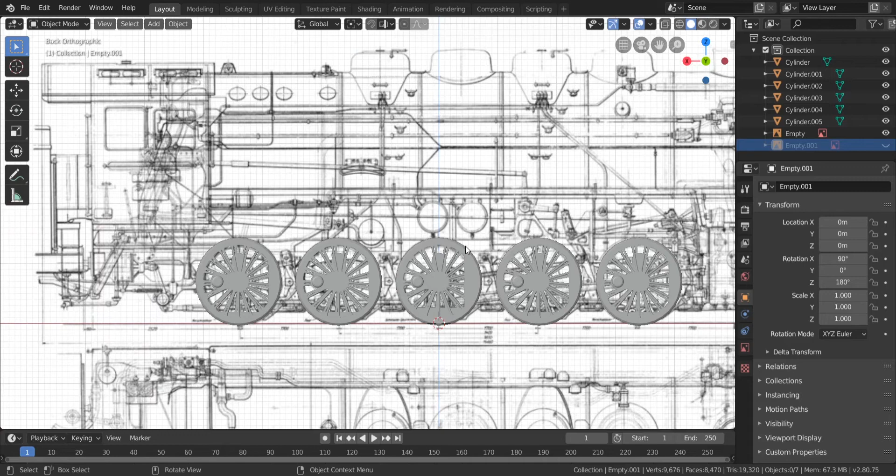Welcome back to the second episode on how to make your own steam locomotive for the mod. In this episode I'm going to be talking about frames. The way I make frames is pretty interesting, in that this is not how a lot of people make frames, but this is how I taught it myself, and this is how I'm going to teach it to you.

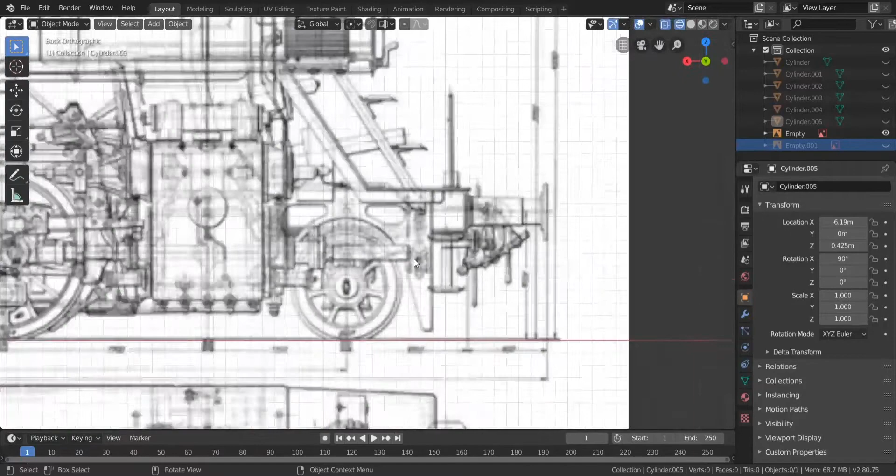So basically, what we're going to do first is, if you can find blueprints of the frame for your locomotive, like these, which I found online, it's going to be a lot simpler. These are actually very good ones, except for the resolution, but you can actually tell the frame on the blueprint. It's always nice to have blueprints like these. But if you can't find them, that's not really a big issue, since you can work without them. So we're going to just start by doing that.

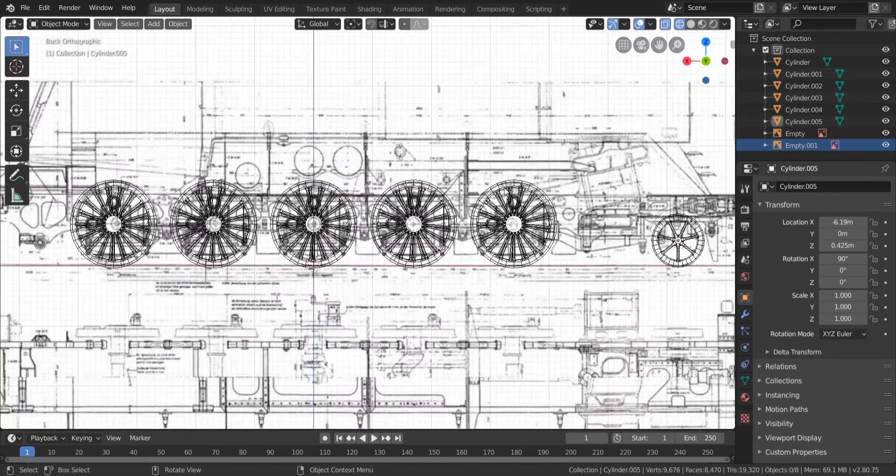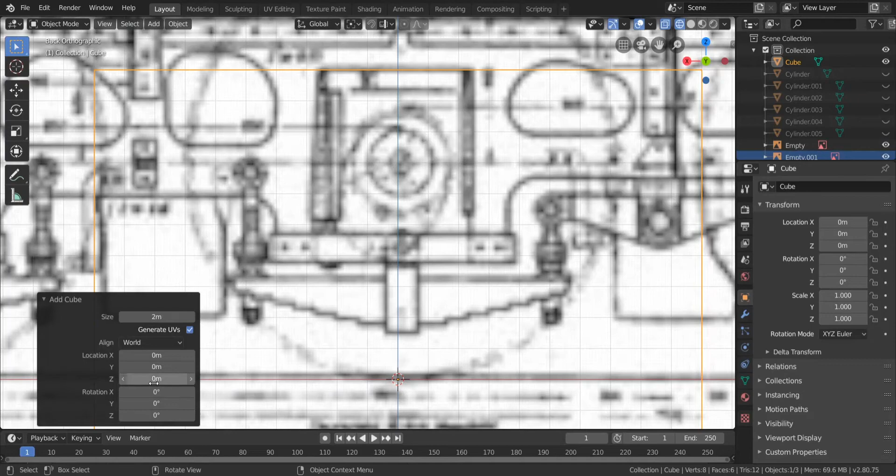One thing I like to do is always hide the wheels. When you have the blueprint scaled to the wheels, you can just hide the wheels and not worry about them for a while. So we're going to go into this side view and make a new cube. What I like to do is bring the cube up a bit and scale it down to 0.04, since frames aren't really that thick.

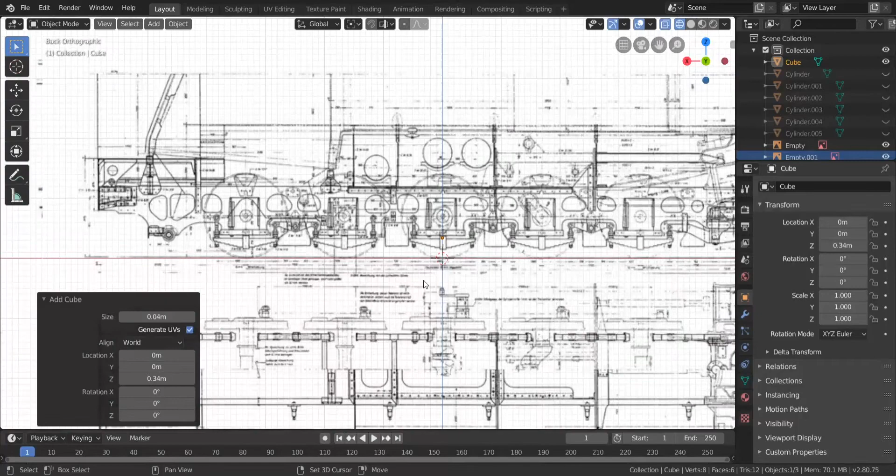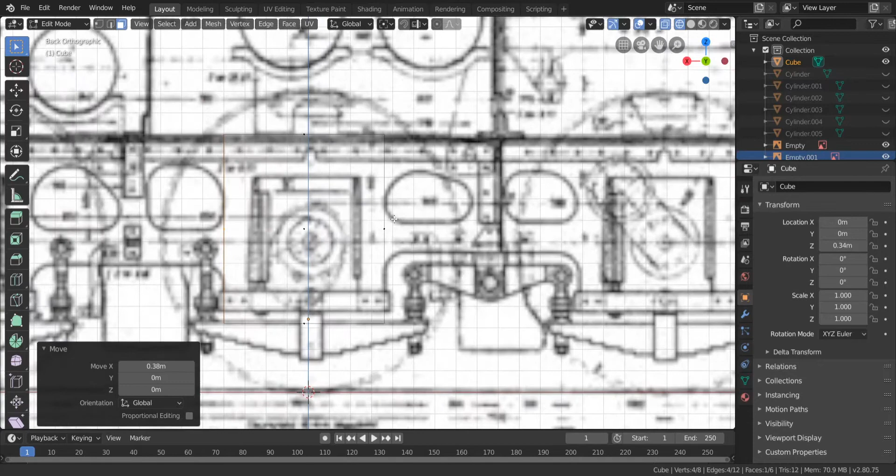So once you've got your blueprints, you go into edit mode and start scaling it to the right size. In my case, I'm just going to quickly do it like this. Seems good. And then on the sides as well. So how do you make this weird shape? Well, what I like to do is just extrude them like so, and then extrude again. We'll get into optimizing later down the line, but this is how you make the basic shape.

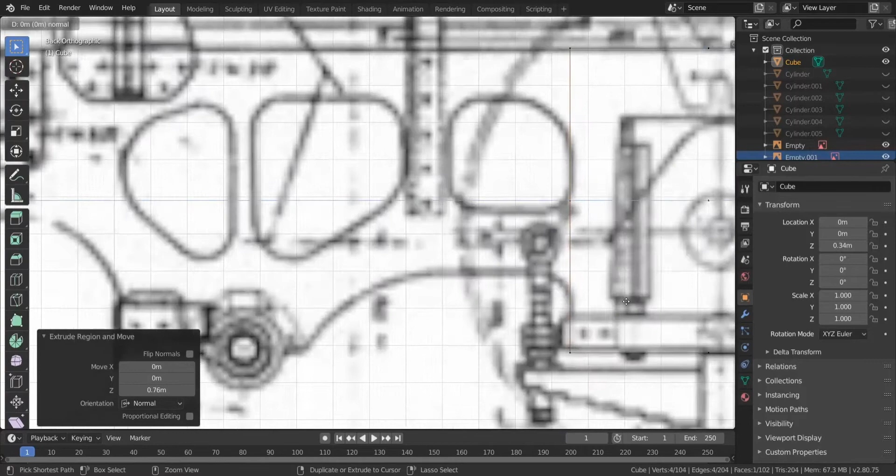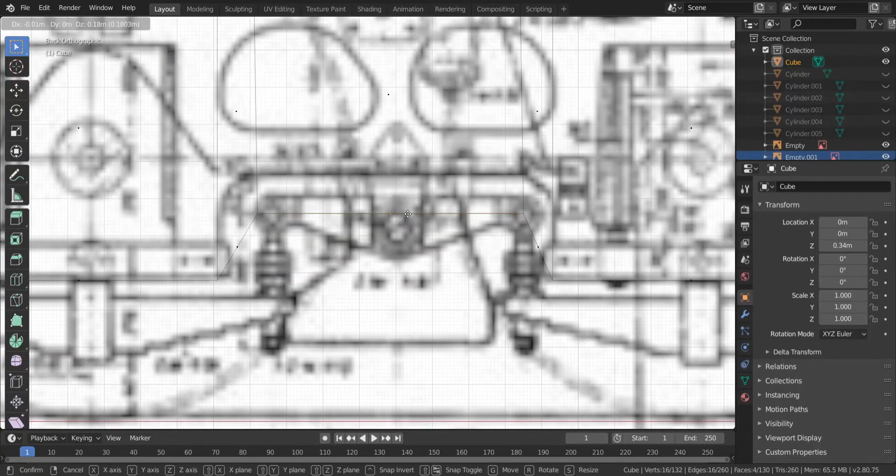Just repeat that a million different times till you have the whole frame covered, like so. Basically repeat that till you have the basic shape of the frame cut out like this. So I'm just going to do that. Alright, so what we're then going to do is drag the faces up to the right position. In my case, we're going to bring these up to this point, like so, without this. Then we're going to do a little bit of this.

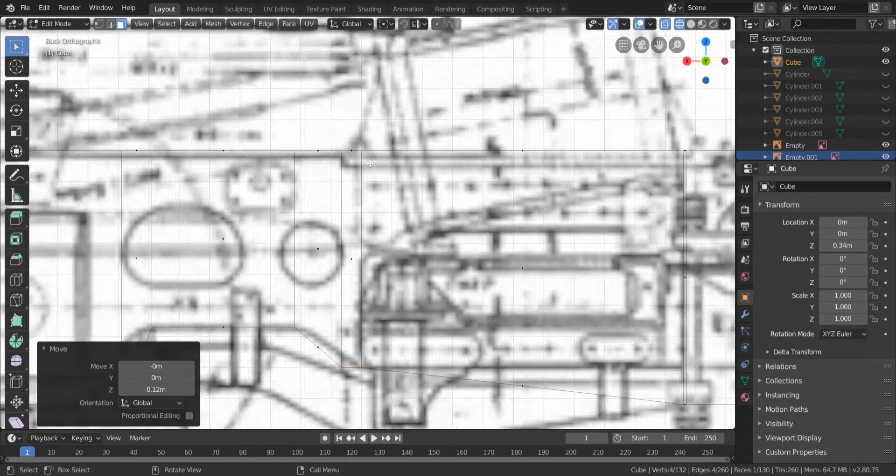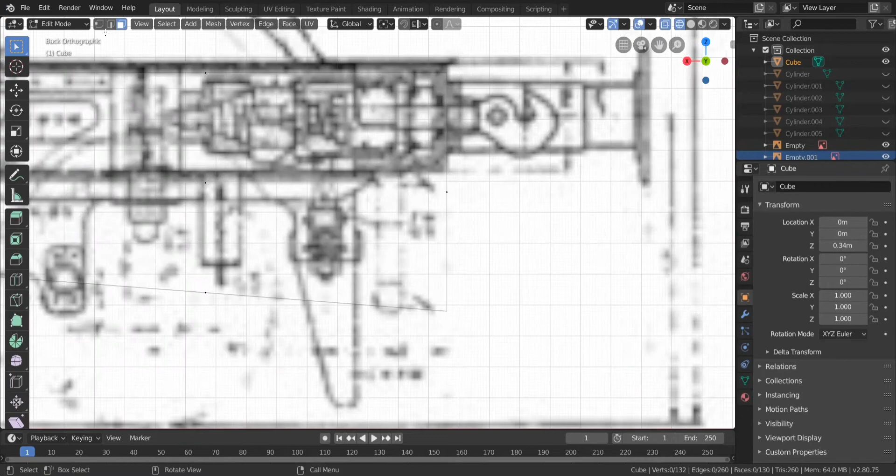The frame, as you can see, is actually one of the most time-consuming parts of the whole thing, since it's one of the most important things that gives the locomotive its shape. If the frame is wrong, you can really notice that in the end, which is something you want to prevent, of course. So you might want to spend some extra time on this, but don't worry about overdoing it. Like so. And then after that, I'm just going to speed that up.

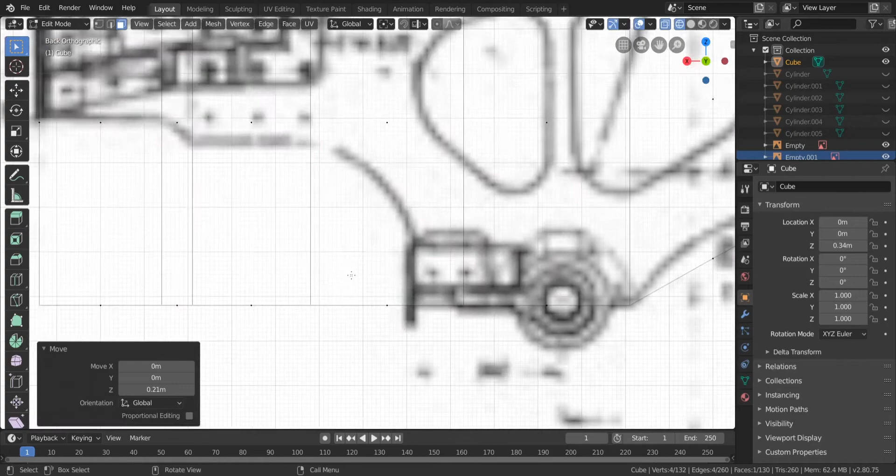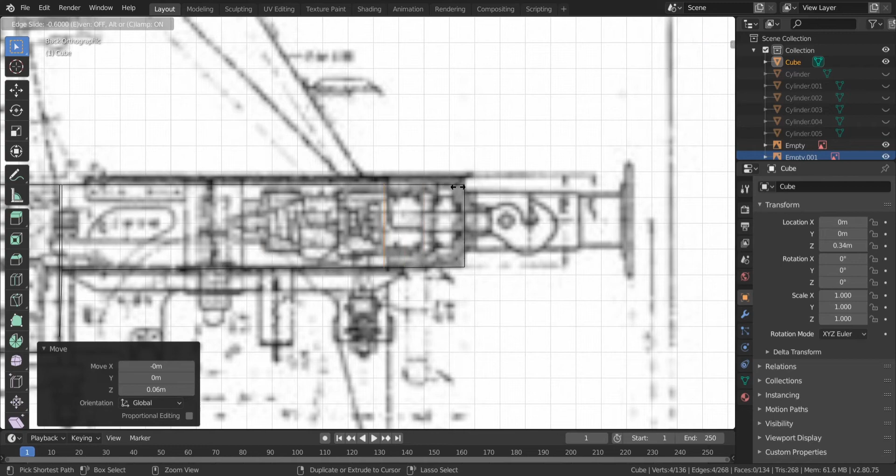Alright, there we go. So now that we have the basic shape of the frame, we can move on to adding the smaller touches. One of the things I normally do is make a loop cut right about here, so that I can make the buffer beam a little bit later down the line relatively easily. I'm going to keep it in the middle right now and then move it by itself so it doesn't get that weird positioning like you saw.

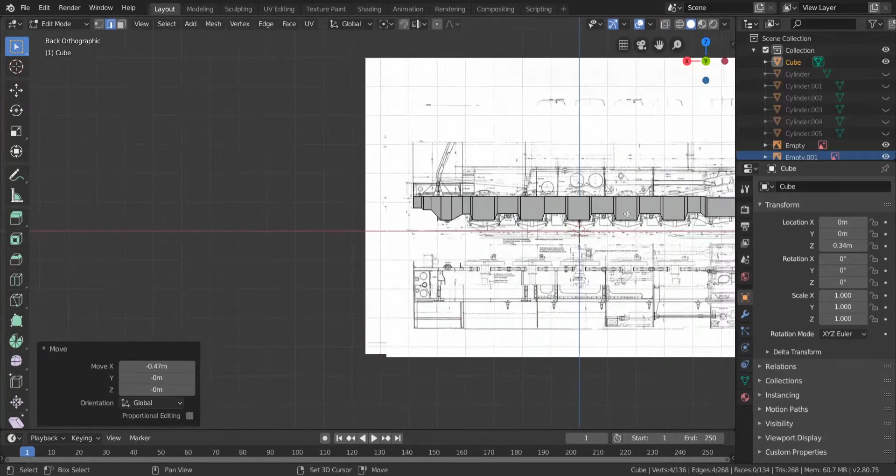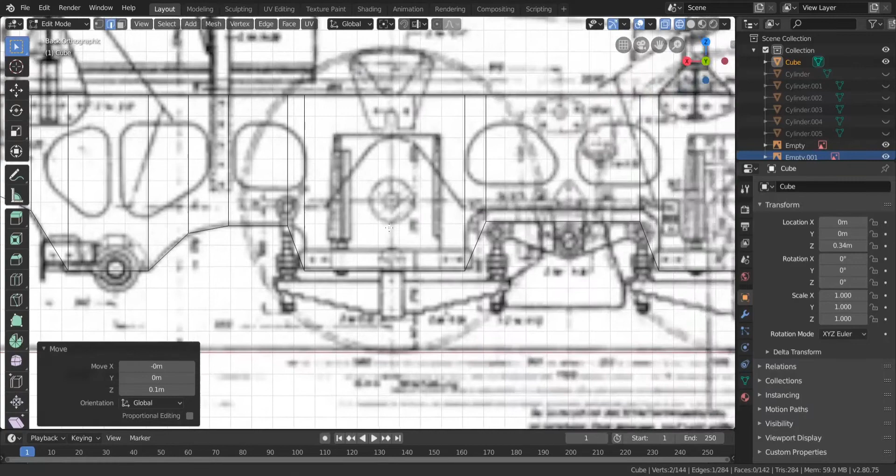And then we're going to make some more loop cuts in the middle here, and move that up just a tiny bit. We're going to repeat that multiple times till we're happy with it. And in some cases, if you really want your model to shine a little bit extra and don't worry about the performance impact, just make some bevels along the lines.

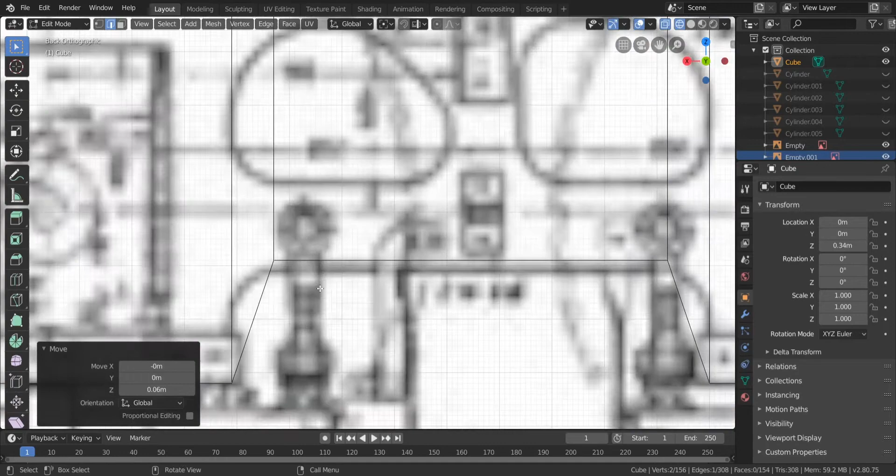But I'm not going to do that, for the sake of wanting this to be relatively lower in poly than most of my stuff, since I've been trying to keep my tris low, lower than, for example, the BR01s I recently made. Well, recently, that's already been a couple of months ago. But yeah, I'm just going to speed this up real quick.

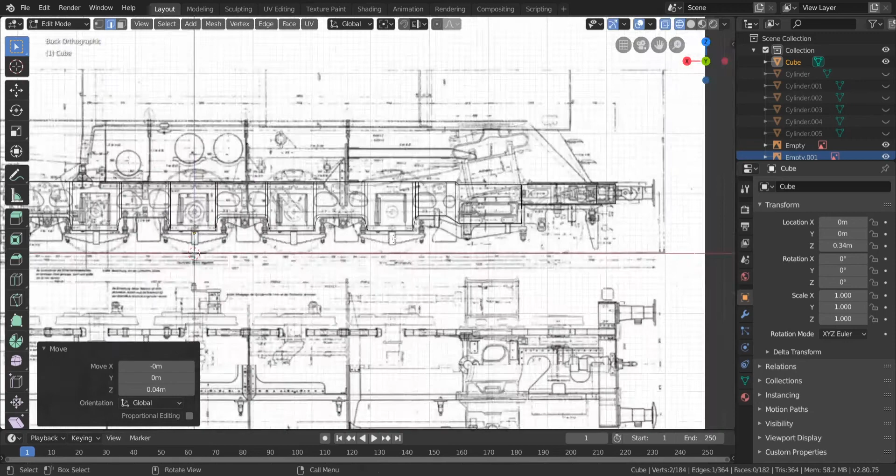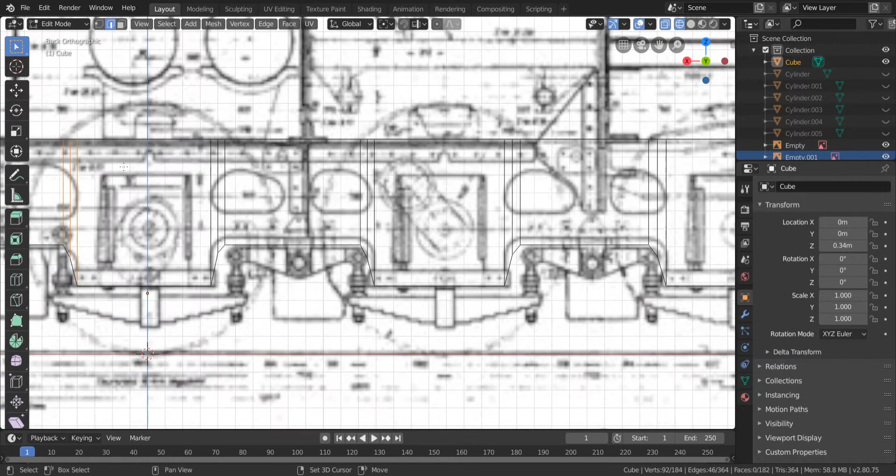Alright, there we go. So we now have this basic shaped frame. It's not that impressive, it's just a basic shape. But what we're going to do now is grab all of these side cuts, not the top ones or the ones that are like this, just these ones. Just select them all. And what we're then going to do is a pretty simple step, except this one, of course, which we just created, since we need that.

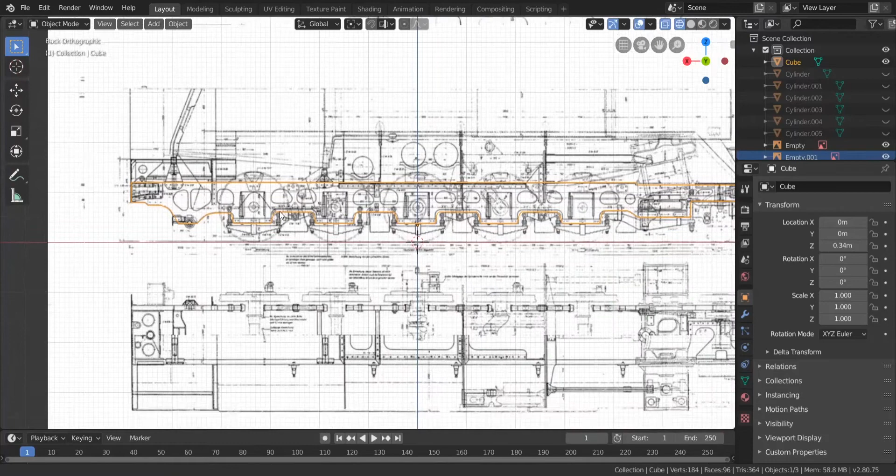And then we're going to dissolve edges. With that, they're gone, and the tri count is a lot lower than normal. So, what we're then going to do is unhide the wheels, the drivers, the trailing wheels, front wheels don't really matter. We're going to go into edit mode and drag it to the side.

But if you're not really comfortable with how thin it is, you can always just make it a little bit thicker in this step. So I'm just going to move it like 3 extra. I normally take 4 as like a starting point, but it also looks pretty good, so like so. And then what we're going to do is Shift D to duplicate it and mirror it to the other side. So what we're then going to do is join them again with Control J.

And the reason I don't have the screencast keys on is since I actually was kind of struggling with it, since I couldn't tell if I was doing stuff right myself. So that's why it's turned off right now.

So yeah, that's how you have like a really basic frame. And then we're just going to go into face select. Select these bridge faces. And then grab a front facing blueprint if you can, or if you know the exact width, go off of that. Since I have a front blueprint saved, I can just grab that front view. It also provides some other views like the cab, which is really handy, and some other stuff. But I'm just going to scale it up to the right size. So yeah.

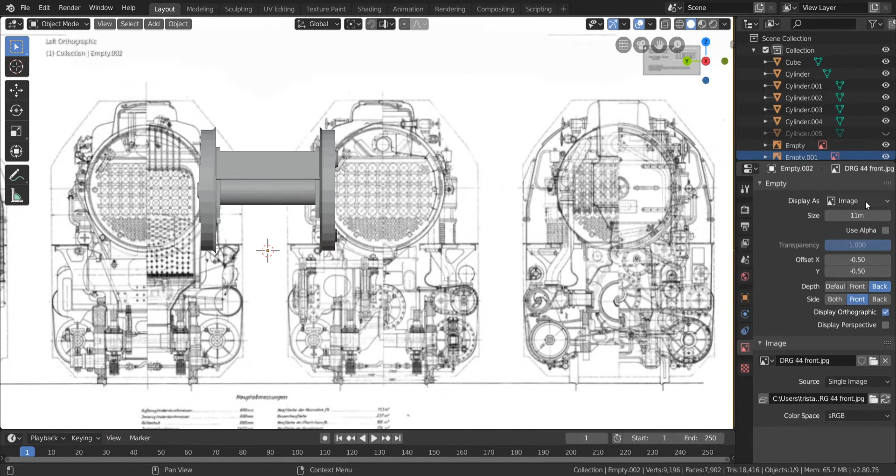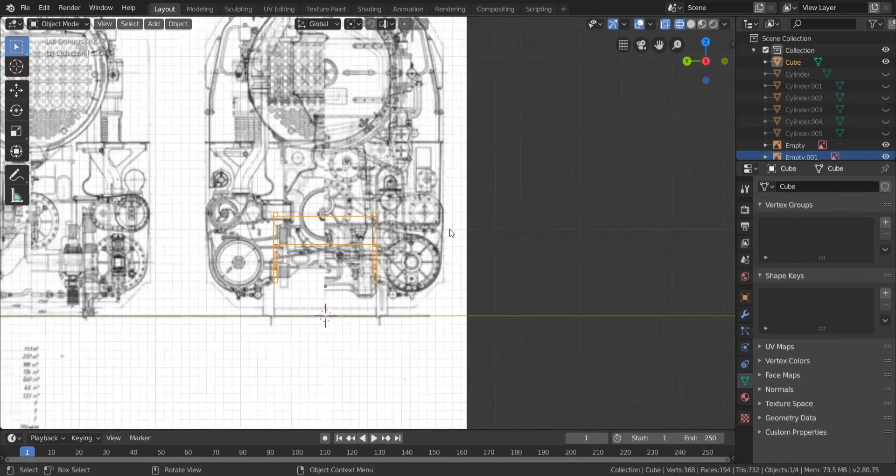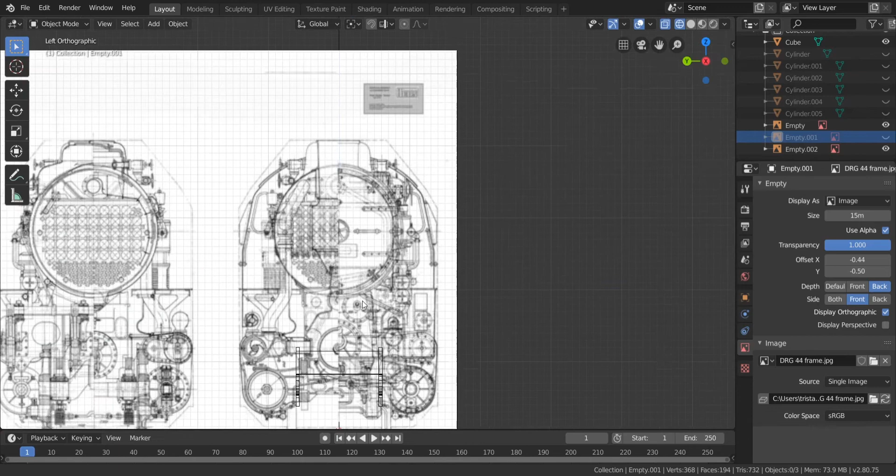Alright, so once you've done that, just hide the wheels so they don't interfere with the view. Go into wireframe mode and check for the thing. If it doesn't align correctly, you probably have done something wrong. So a good way to check is to see if the locomotive has the same height as the other blueprint. So let me just hide this one. And then just point your finger at it and just draw a line. In my case, it's about right. So I'm just going to extrude these faces a certain amount.

That looks a bit too wide, so I thought it would be right, but in my case it's actually a bit wrong, so I'm just going to go off of this now, since I actually noticed it just now,

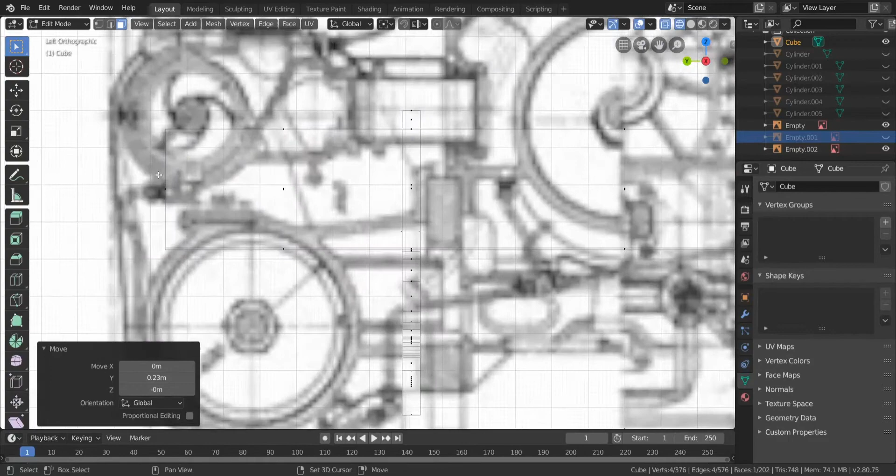since I'm actually kind of blind at the moment, since I don't know if you can hear it, but I got sick yesterday, so that's also one of the reasons why there wasn't any tutorial yesterday, so yeah, that.

Other than that, this looks great. Then we're going to go into edge selection, select these edges right here. Like so. And then we're just going to do a simple bevel. But if you get weird stuff like that, it means that, like in the last video, I just noticed that this is the problem.

Apply scale, and then Shift N to recalculate the normals. And now it should function like that, since that is a common normal issue, I notice. So it should work now. There we go. Simple as that. Normally you bevel around like so, and like this.

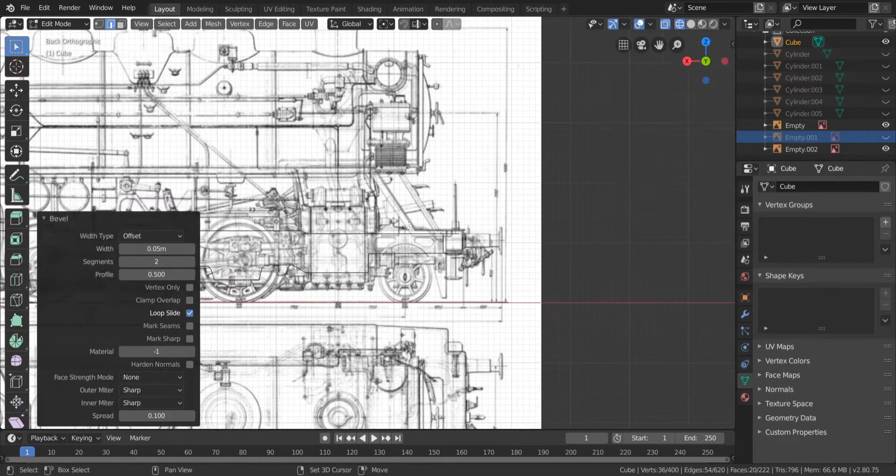In my case, the blueprints don't show it like this, but I'm 100% certain that it is like this, since I've actually seen this thing in real life and can assure you it's like this. Though it needs to be a little bit higher, that's correct. I just moved it a little bit too low. There we go. So, alright, there we have a basic frame with the buffer beam, so it's also connected.

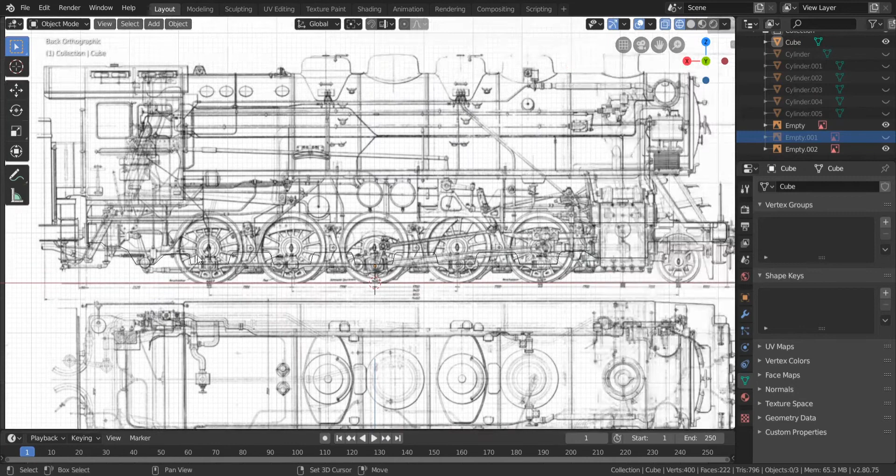What we're then going to do is grab our blueprint again, if you have any, otherwise just have a keen eye or a reference. I forgot to mention this. A reference, like a reference picture, is very important to have as well. Reference pictures, so you can take a look at those if you don't have a frame blueprint or something.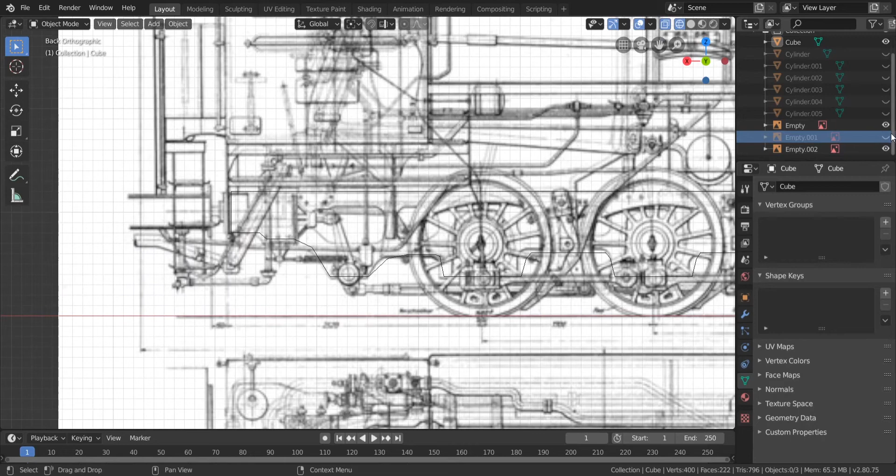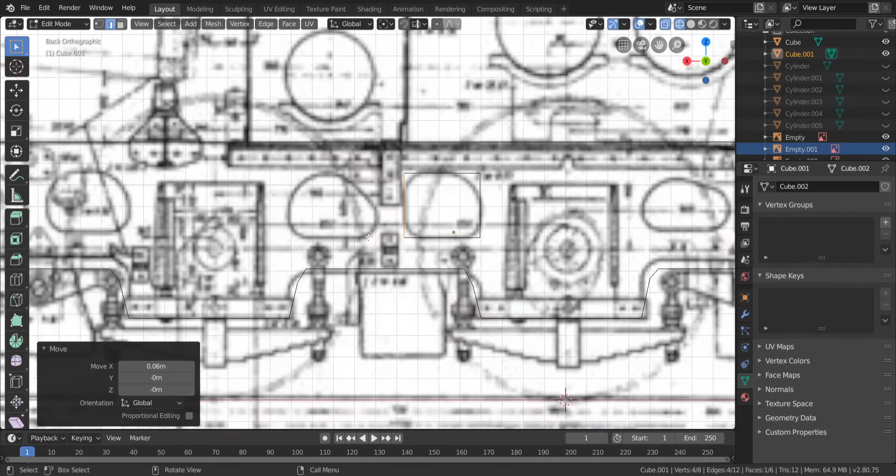So basically what we're going to do is create another cube and then just put them in the right position, like so. Then just scale them up a bit if needed, and then we're just going to move them a little bit around, like so. And then we're going to duplicate these a couple of times, since all the holes are a little bit different. So you need to have different kinds of bevels and cuts to get the right sizes and right shapes done. Like so.

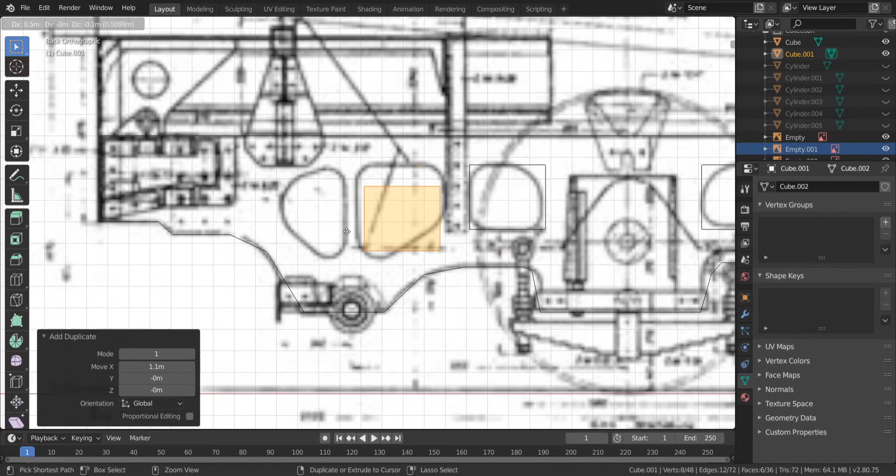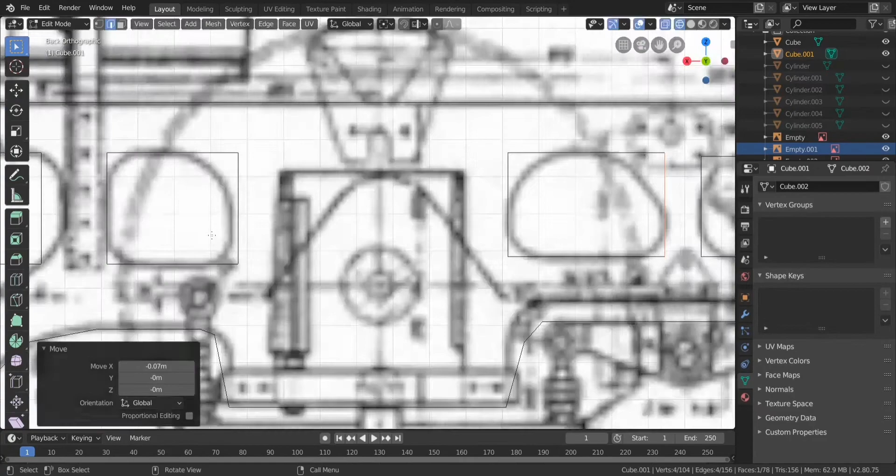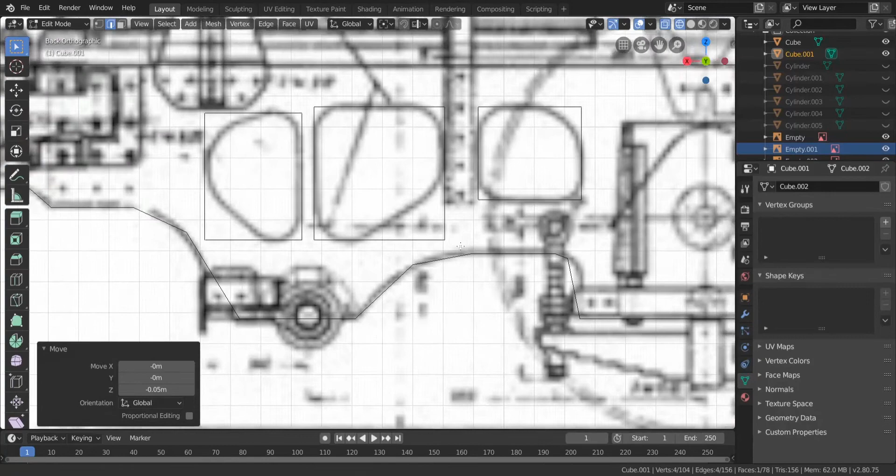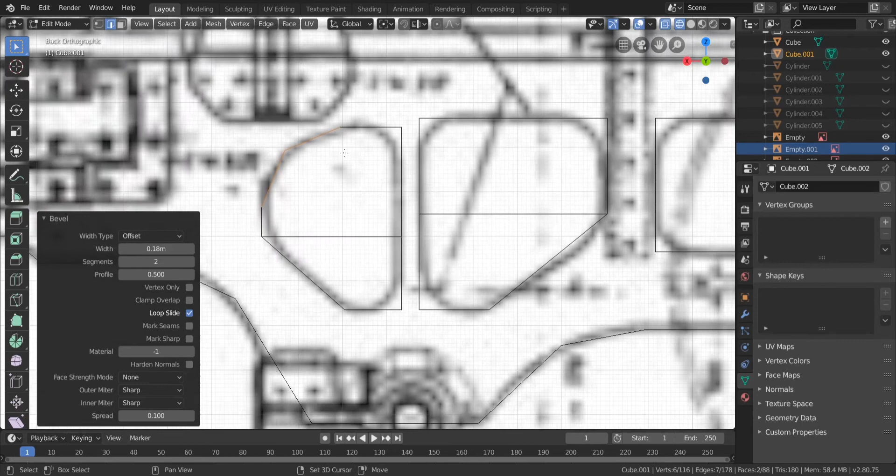Even these circly things I usually do with a cube, since you can just bevel them. And then after that we're just going to reshape them. Alright, so once you've scaled them all correctly, we're just going to bevel these edges each in their own way. But in cases like these, just make a new loop cut and bring it in like so. So it prevents weirdness, and it works like that. Also try to keep these around the 1 or 2 mark, so it doesn't look too high poly and it isn't too high poly.

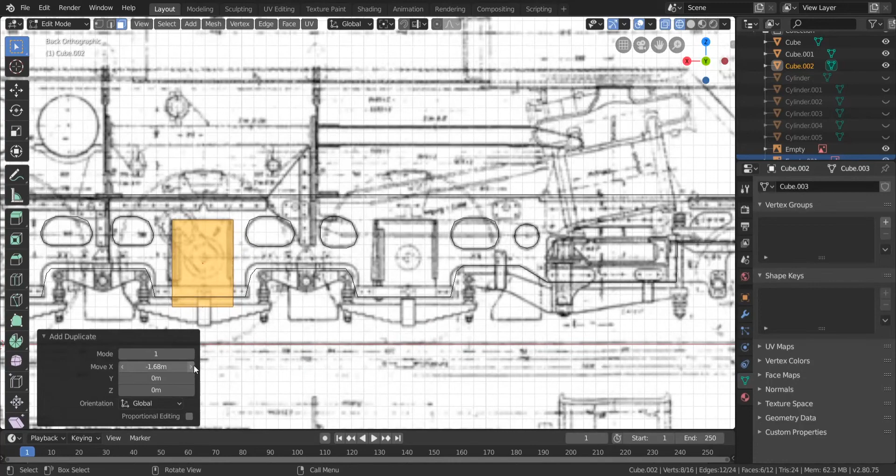Alright, so once we have that, just select everything and scale it way on the y-axis so it clips through the frame. We're going to actually make another cube and make the cut on the frame where the wheels are supposed to be. So just scale it to the right size, in my case 0.5, and then just grab it and make it go down, duplicate it a couple of times so it actually fits in the frame, and there we go.

After we've done that, we scale it on the y-axis as well, and then we're just going to merge these two together in the same way we did earlier. Once we've done that, just select the frame like so, and then we're going to go in here, add the modifier boolean, select these, and it should cut out properly like so. If it doesn't, you have done something weird with your mesh, or something else has happened. But anyway, that's kind of how it works.

But don't apply this yet though. We're going to do that all at the end of the tutorial series when we're going to export it, since now you can still make changes if you don't like it. And this is basically how you make a frame. It's not too hard, it's not too difficult. Basically everyone can do it, and it gives great results like this. Might not be the lowest tri count option out there, but it sure does look nice.

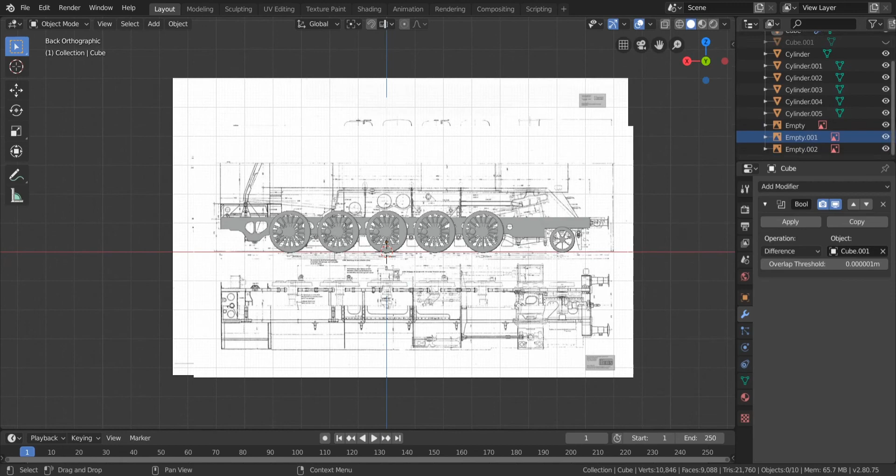So in the next episode, I'm going to show you how to make the basic layout of the locomotive. So that means the boiler, the upper part of the frame, the cab, and all that kind of stuff. So I hope to see you then.